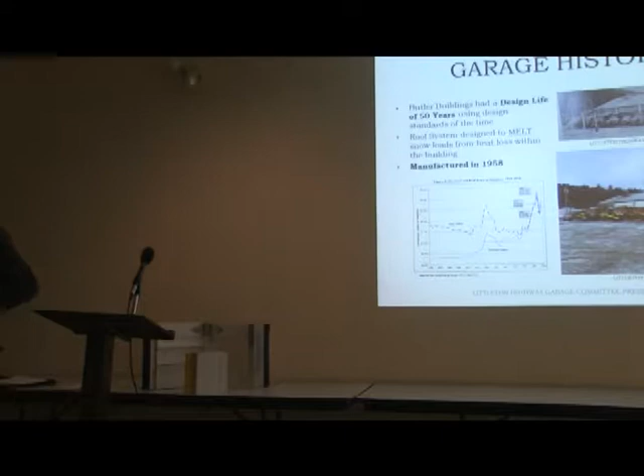Good evening, everyone. We're going to start off with some garage history, and I'm going to introduce Carl Hilgenberg. My name is Carl Hilgenberg. I'm a member of the committee, and I want to give a little background on how this all came about.

The purpose is to examine and record. Pro-Con and Lorber was hired by the town to study the town garage. I'm quoting now from Pro-Con and Lorber's report that they gave the town, and it covers a lot of the basis on what we've been working on to decide whether to repair the old garage or replace it with a new one.

The purpose was to examine and record the structural condition of the Town of Littleton's municipal highway garage building, located behind the fire station, and to determine the structural properties of the building components and analyze the building to determine its load carrying capacity for comparison with current building load requirements. They're talking about snow. Specifically, the town wishes to determine how the addition of insulation to the roof of the existing structure will affect the building's performance under snow loading, which is expected to increase as a result of the addition of insulation. That was if the building was going to be renovated and not replaced.

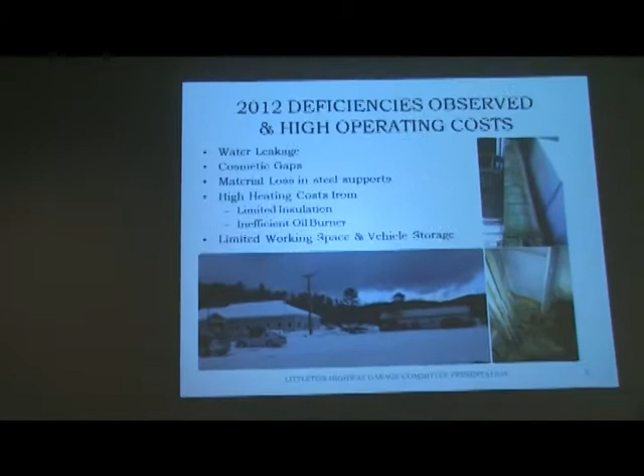The prefabricated metal gable-ended, variable depth, rigid built frame is a Butler TM building, manufactured in 1958, made up of both 36 KSI and 42 KSI steel. The building frame is covered by a metal roof placed over a 2-inch layer of fiberglass insulation. I'll repeat, 2 inches of insulation, sandwiched between a plastic covering. The insulation is compressed and thus rendered largely ineffective between the metal roof and the Z-purlins to which the roof is attached.

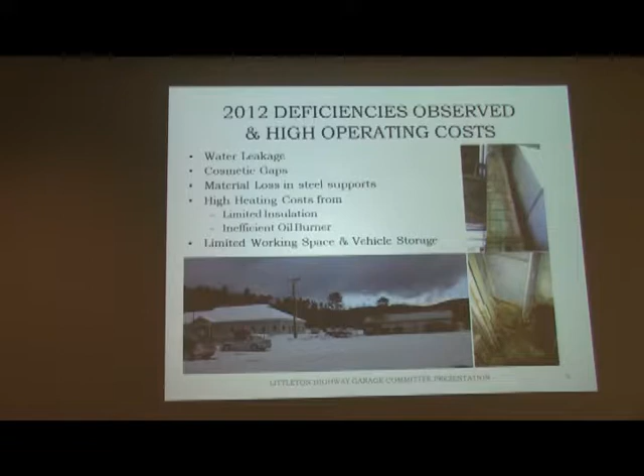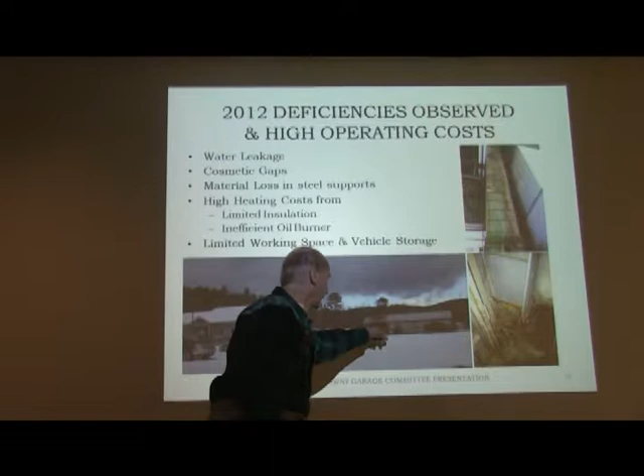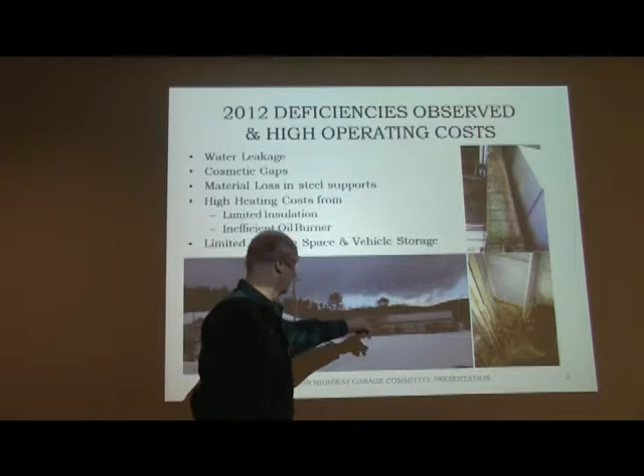The Z-purlins span 20 feet of rigid frame and carry the roof loads to the frame at points roughly 4 feet apart. On this building, the steel girders run every 20 feet, approximately over each door. A Z-purlin is a thinner steel beam that runs between the 20 foot spans, shaped like a Z — it goes across, comes back in to the next one, and across again, which is why it's called a Z-purlin.

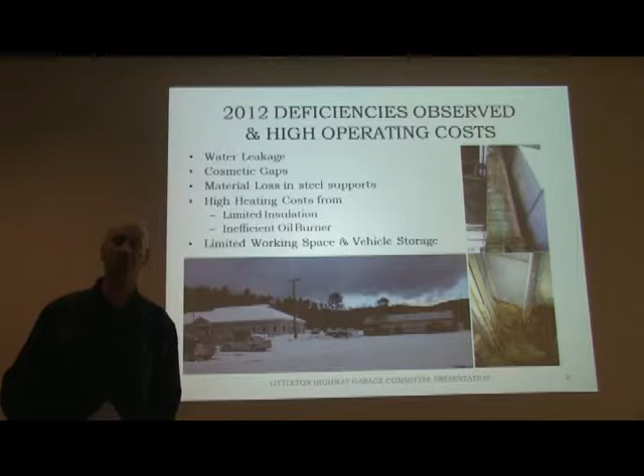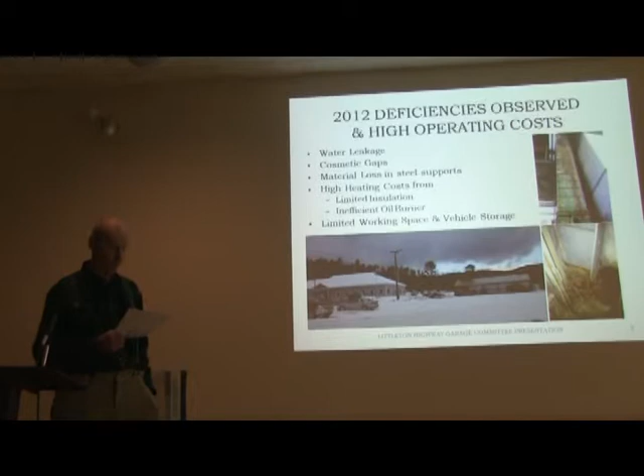The existing building was designed and erected in the late 1950s and was never intended to carry snow loads of significant magnitude. Prefabricated buildings of this type were expected to shed snow loads as a result of heat loss occurring in the lightly insulated roof. The primary intent of the insulation was to reduce the transmission of heat from the roof into the interior of the building during the summer months.

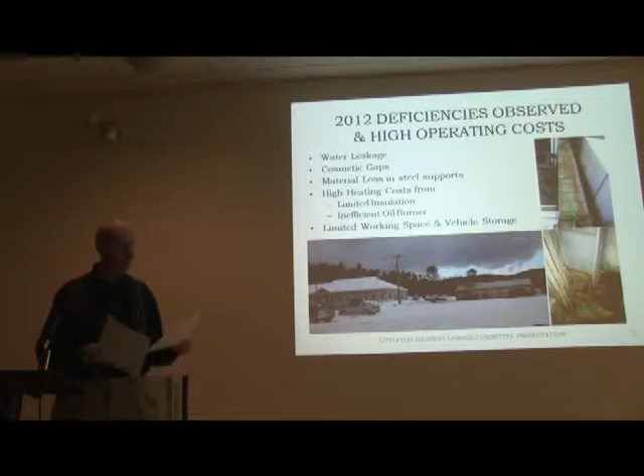Now, the main original section has less than 2 inches of insulation. A hot roof in the back of the building is a 20.5-foot addition that was put on by the high school trades committee school. That addition has 12 inches of insulation in the roof. At the upper end, that insulation stops and meets the old existing roof with 2 inches of insulation in it.

That's the hot roof. So the snow melts off the hot roof, it comes down, it hits the new cold roof, and you have Lake Mead. The water just sits there, dams up, very heavy, and then runs down inside the building and along the back wall.

Here in Littleton, the ground snow load in the course of a heavy snow winter is 68 pounds per square foot. The minimum design load for buildings and other structures is 58 pounds per square foot. In other words, if you're going to build a new building and meet the code, that building has to have a minimum of 58 pounds per square foot.

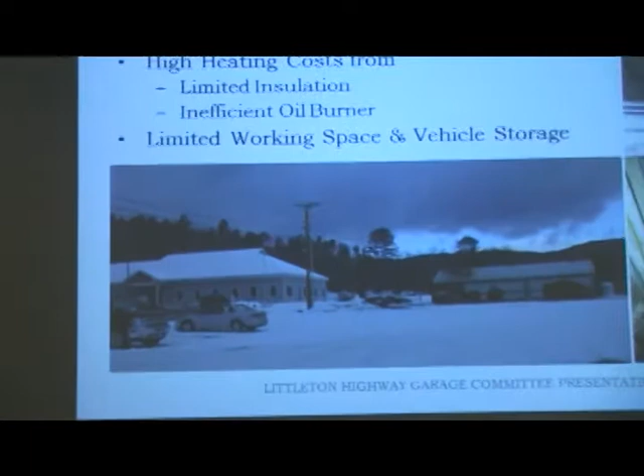Looking at the slide here, the police building on the left is well insulated. It's a new building, just a few years old, and you can see the snow is still on the roof. None of it's melted off, and that wasn't even a very cold day. This was a fairly warm day.

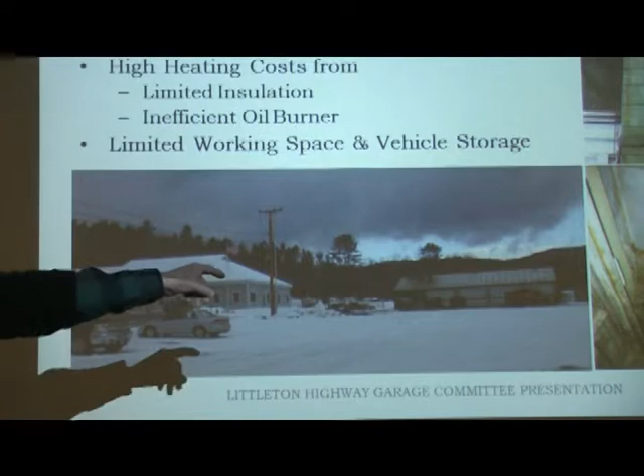And this is the existing highway garage, and look at that roof. There's not a drop of snow on it. It's absolutely bare.

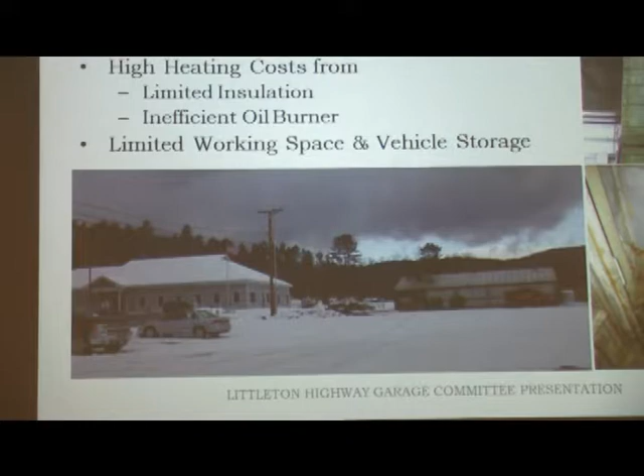If insulation is added to the roof of the existing building, the building can be expected to fail, possibly in a catastrophic fashion, under a load as little as a third of the currently required snow load. This building has exceeded its intended life and is not readily upgraded to modern standards. Provan and Lorber, quote, unquote.

Due to the significant heat loss experienced by this lightly insulated building and the increasing cost of heating fuels of all kinds, replacement of the existing inefficient oil burner is recommended for the short term. That was done later, but we did a pellet boiler instead. And I think the furnace in there is fairly new, isn't it? Yeah.

For this reason, and due to the plethora of other problems in the existing structure, we believe - Provan and Lorber again quoting - it advisable for the town to plan for the replacement of the garage in as near a future time as possible. And that's the conclusion this committee has come to, and we're recommending that the town vote in favor of the new building, which will be explained to you now.

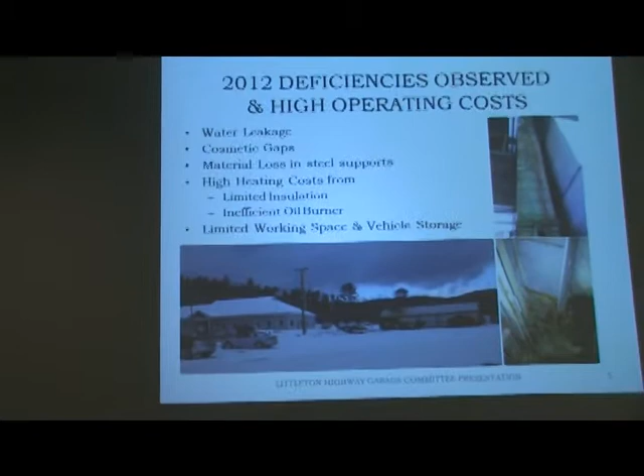Just to recap, in 2012 the Public Works Director at the time had noted some deficiencies. Prior to the Provan and Lorber study, they noticed water leakage, cosmetic gaps, material loss, as shown in this lower right-hand corner around the base plates, and they had high heating costs. Obviously, as they show up to work, they see there's no snow on the roof, so all that heat's coming out of the structure, causing a fairly high fuel bill during the winter months. They also had concerns with limited workspace and vehicle storage that wasn't addressed in the Provan and Lorber report. However, in 2012 when they engaged Provan and Lorber, they decided to at least address these main items.

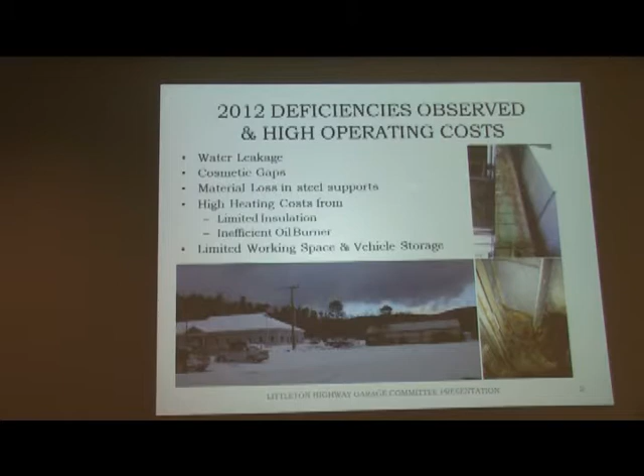So there was some forethought in having this complex be connected, having a central heating source, and this was just completed this fall, so several months ago.

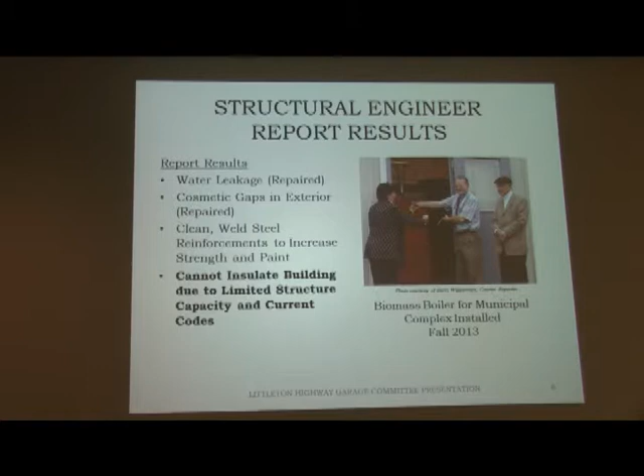So the majority of the report results, the ones that the town could take care of, have been completed. It's the major stuff that the committee had to tackle as far as rehab or replacement.

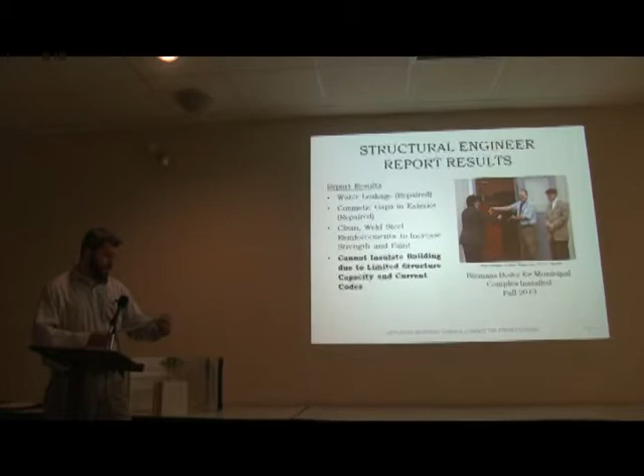Also, the technical information which Carl was referencing, as far as snow loads and things like that, it's a published document, published in February of 2002. As you can see from the previous slides, the building was erected in 1958, so obviously they didn't have the information then to design a building to meet 2002 recommendations. That's where this comes into play.

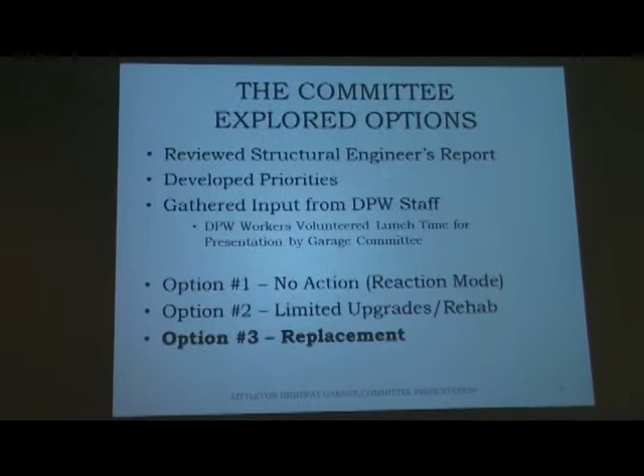Next slide. So we explored options, we reviewed the report, we developed priorities. I think at every meeting we ended up with a hit list for each person, questions that needed answers, so we came up with what we wanted for the next session. So we were very organized.

We talked to the DPW staff, we were involved with the town, we had the DPW workers in for a lunchtime presentation. We went over some of the information that was in here, just got a feel for what they needed, especially when talking about workspace, future capacity, things like that.

We came up with three options. First option was no action, which meant we were in reaction mode. We were hoping that... this was thrown out because there's too much liability and risk with having that sort of reaction mode.

You would be waiting for a big snow event, waiting for a chance where you weren't out there pulling the snow off the roof, that ponding that Carl was talking about, things like that. You'd be in reaction mode, and there would probably be high risk to the town, most likely a safety concern.

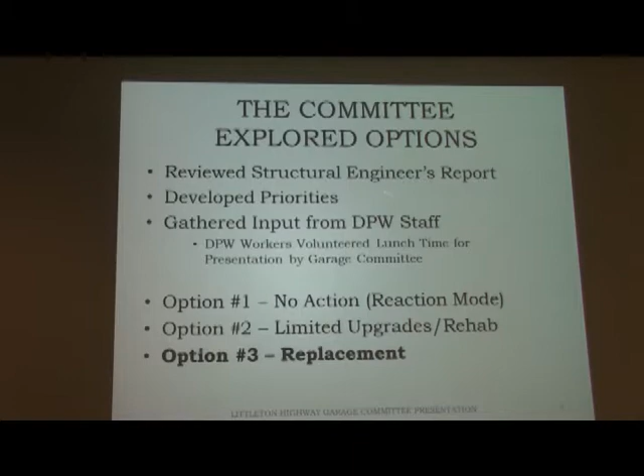Option 2 is limited upgrades and rehab. When we start talking about reinforcing members, grinding things down, increasing their capacity, things like that, they can be done, but you really don't get much life out of it. Meaning that...

When you compare everything together, for instance usable work areas and heated floor space and things, you'd be talking about adding on to this existing structure, adding on to the members. And you've already exceeded the life expectancy of the prefab, the Butler building, and now it's time to consider something else.

So option 3 was what we went with, and we all felt very strongly about that. You can spend a little bit of time and a little bit of money over the course of the years, but I think it's probably time.

Are you missing another option? Is extensive upgrade, where you go in and reinforce it so it meets codes and all that, without... That would be option 2. You would bring it up to code.

Limited. Yeah, what's the cost of that versus the cost of replacement? Well, we had that option, but we would have had to retain a structural engineer to come in, come up with plans, and at the end of his analysis, you may find out that...

You didn't get numbers on what it costs? No, we did not.

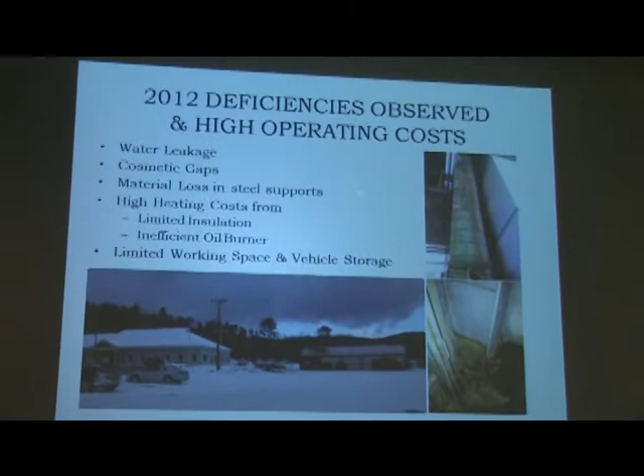Yeah, we wanted to also address the heating costs, where if we're going to do something, we'd want those numbers compared to numbers for replacement? We don't have those. It's all opinion.

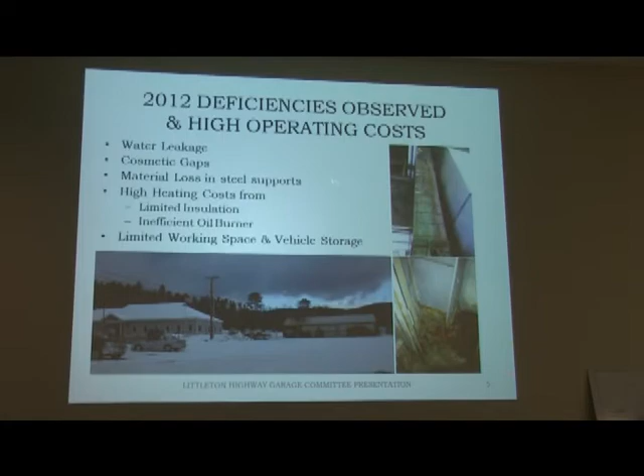Correct, I can address that. Yeah, I think it's good to have questions, because I think that's kind of why we're doing this. Some of this information, or one of the reasons for the meeting, is basically to see if there's information people are looking for, and I think that's really a great question. They may not have everything tonight.

It was an additional expense the committee would have had to encumber to come up with those answers. But I think it's noteworthy to bring that up, because when we get to the town, when we're presenting it to the town, that's going to be the critical time.

Did you want to let maybe Kyle add a little something here?